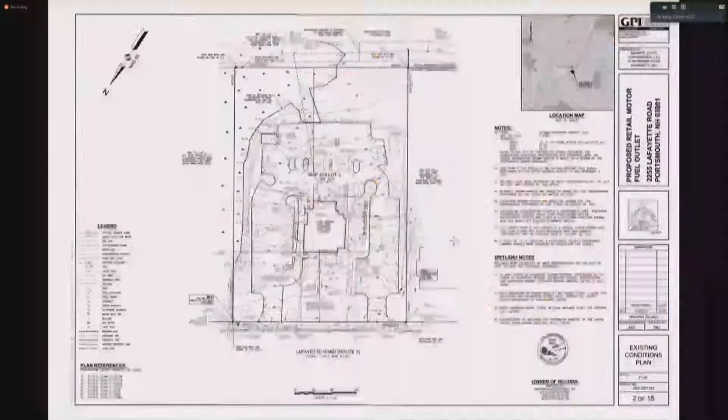It goes a little bit further away along the side, but I do want to mention that side wetland over to plan left or east on the plan is a swale. That is the outlet from the DOT culvert, from Route 1 or Lafayette Road, which outlets out into that swale and brings it back to the main wetland system. So it is kind of like a finger that comes out from the main wetland system.

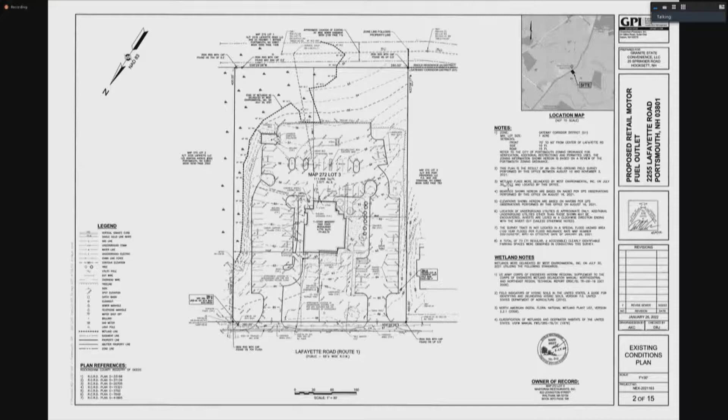Do you mind going to sheet 4? Okay, so what we're proposing is, forgot about this. What we're proposing is a 4,970 square foot building. It's going to be the Common Man Roadside.

Similar locations, there's one on Goffs Falls Road in Manchester, corner of Goffs Falls Road and South Willow Street. And then there's another on Plymouth Street. This will be similar to those. It is a different building footprint, but this is their new prototype footprint.

So it's going to be Common Man Roadside with a drive-through. As you can see on the plan, there is a main drive-through lane, and then there is a secondary drive-through lane for mobile pickup orders to allow the queue to go a little bit faster.

We are proposing 26 parking spaces, and then an additional 10 spaces are allotted at the pumps. At the pumps, we have 5 fuel dispenser islands, which means 10 fueling locations, or the 10 parking spaces that we have there.

I do want to mention, we did originally, way back when, I can't even remember what month it was, but I think it was last summer maybe, or at the end. Anyways, we met with Peter and the staff at the time for a conceptual staff meeting. And the original plan did show parking spaces.

Sorry, this isn't working for me anymore.

So we did show parking spaces along the wetland finger. We showed it closer because the edge of pavement does come closer. We showed parking spaces there. We showed a loading area, a bigger pavement area to the rear of the site, closer to the main wetland system. And I believe the USTs were over on the left-hand side of the plan too.

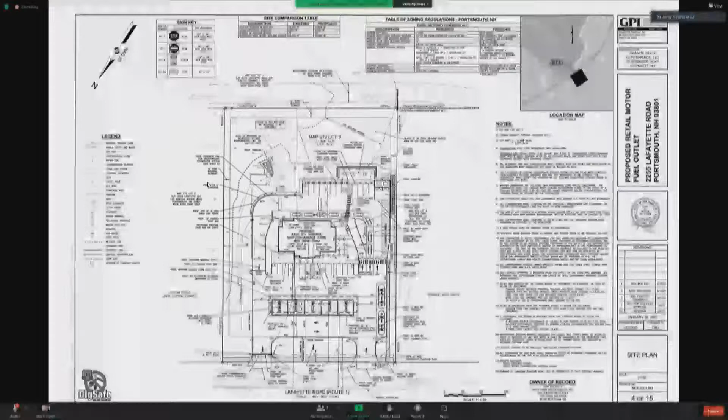The other thing that was mentioned was providing a chain link fence along the back of the site, just to make sure that any flying trash or debris that manages its way on the site is collected at the fence, rather than going into the wetland.

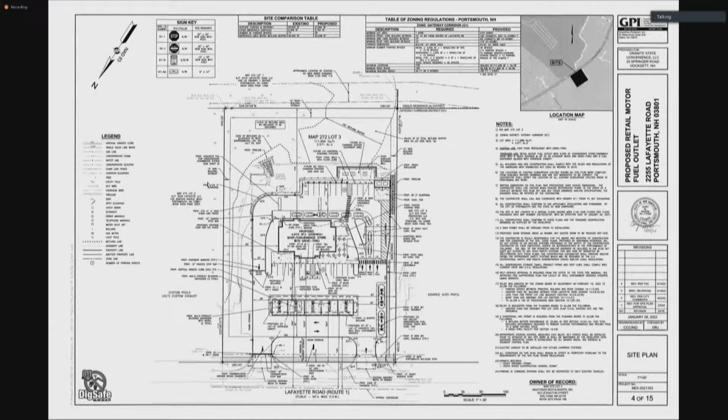So, to just talk about the stormwater that we've proposed on the site. Do you mind going to the next page, Peter? Thank you.

So there's various catch basins around the site, and there are deep sump catch basins with oil water separator hoods. We do have, all of that does go in the back.

We do have First Defense hydrodynamic oil water separators for a pretreatment unit, as well as an oil water separator tank in the back, just to make sure that any oil that spills on this parking lot is contained within either the catch basin, the First Defense units, or the oil water separator tank.

Then after the water is pre-treated, it does go into an underground storage system that's in the back of this property, back here. And then it goes into a jellyfish treatment unit, which I believe the city of Portsmouth is very familiar with those jellyfish stormwater treatment units. I see them popping up all over the place. So that is in the back, and that's able to treat all the water from the site.

So we're going from a site that has no drainage, no stormwater treatment on site. All the drainage existing is sheet flowing right into the wetland or to Route 1, to a site development that will treat all stormwater, both pre-treat and treat all stormwater before it does outlet into the wetland or off the site. With that being said, if you have any questions, both myself and Mr. Pernar are here. Thank you.

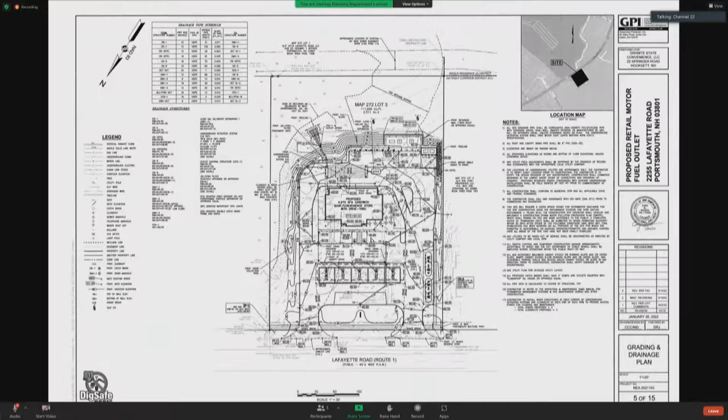So in order to do porous pavement, you have to do a whole batch. You're getting charged for a whole batch of pavement rather than just that small section. As far as the pavement on the site, I don't recommend porous pavement for a gas station. No, I understand that, but that's why I was suggesting sidewalk, patio, parking area, something like that.

The sidewalk along the building, I'd have to look into a little bit more. I know for maintenance reasons, they don't typically like to have them right against the building on a very frequented site like this, but I would have to do some more research on that.

So was there a maintenance plan for the jellyfish filter? Because I couldn't find it. It is in our stormwater management report. Okay, towards the back, there should be a stormwater management manual with that inside of it.

Okay, and then the final thing is that the fertilizer should be slow release. Okay. I think that was one of the comments that Peter had put on the letter too. Slow release.

Thank you. Others? Yes, Abigail. Can you talk about, the gas pumps are within the buffer and close anyway. Can you talk about, and I don't know where the storage tank is for the gasoline. Can you talk about, that's over there, okay. And the buffer line actually is back here.

Okay, can you talk about what protection you'll have for any leakage or anything? Sure can. So I know you found them yourselves right now, but just for everybody's knowledge, the USTs, the underground storage tanks, are as far away as we could get them. They're located over here. We are in the buffer a little bit over here with, I think, one of the dispensers.

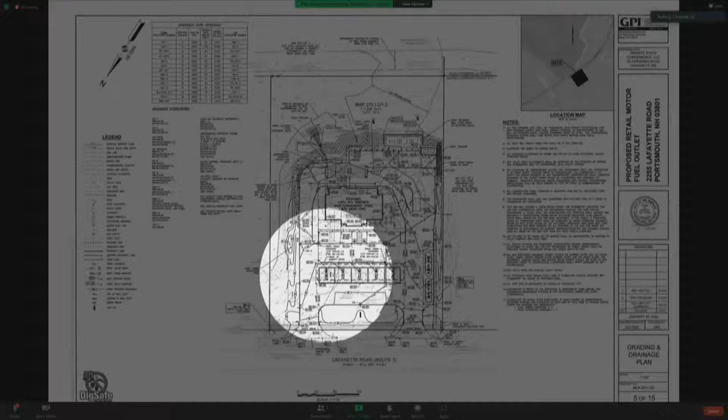So around each one of these islands, there are positive limited barriers, also known as spill prevention grooves. Those are your typical grooves within the concrete. So that's our first line of defense. If anything, say a couple of drops go on the concrete, or someone takes out the nozzle and has that handle on, that will contain that.

Within the dispensers themselves, if a car still has the nozzle in it and drives off, there's a shear valve there, so it will disconnect and automatically shut off the gas, so that is not a problem. Same thing with the actual dispensers themselves - if they get hit, again, it's automatic shut off.

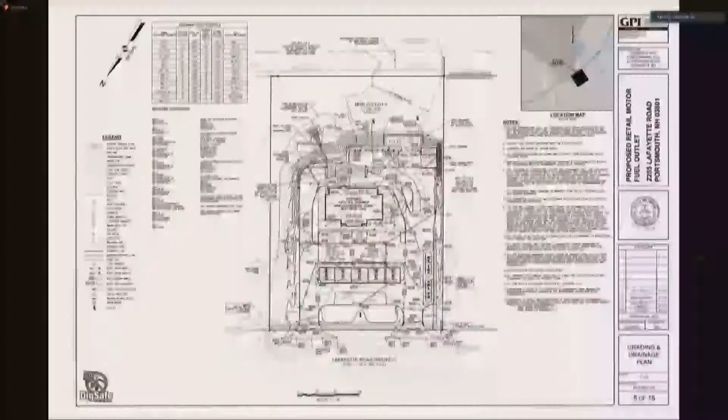Underneath of each of these dispensers, there is a sump that can contain any fuel leakage as well. Another thing we have is an alarm system. Each of these systems has an alarm system that detects minute losses in fuel. So if there is a minute loss in fuel, that will automatically shut down the system as well. So nothing can be going on underground that isn't alerted.

Along with the pipes are double-walled pipes, so that if there is something wrong with that interior pipe, that exterior pipe will collect it. Same thing with the underground storage tanks - they're now required to be double-walled fiberglass tanks. Those will be per DES regulations on the tanks, and those have sumps underneath them as well. There are vapor prevention systems in it as well, so that we're not having the vapors of the gas going into the air.

So there are multiple checks and balances within the system itself, and I can provide you literature on each one of these. I'm sure I'm missing one or two, but I can provide a sheet of what is contained in these systems as well.

Thank you. Any other questions from others? Yeah.

Many people who come before us that are close to wetlands in this situation, we ask them not just to use the right fertilizer, but to follow the standards of the Northeast Organic Farming Association. We can send you the standards - they're very flexible, just best practices for guidance so that you maintain the property with NOFA standards. That would be great.

So I know in the memo that the staff put out, there was mention of adding plantings along where we're removing the pavement. I'm guessing that the majority of buffer plantings we want are back here, so that will be added as part of the staff recommendations. Thank you, that makes it a lot easier.

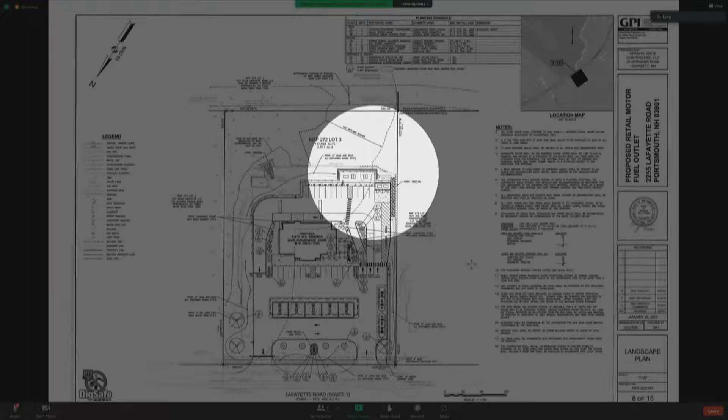As far as actual plantings go, we are not removing a whole lot of trees. There'll be some tree removal within the area where we have the sewer line going in, and we'll request minimal trees removed for that installation. As for actual buffer removal, there's a small section right at the corner of our charging equipment storage, and just a small amount up here. So as far as buffer goes, we're actually going to be increasing that, not reducing it. We are taking down that bigger tree in the front.

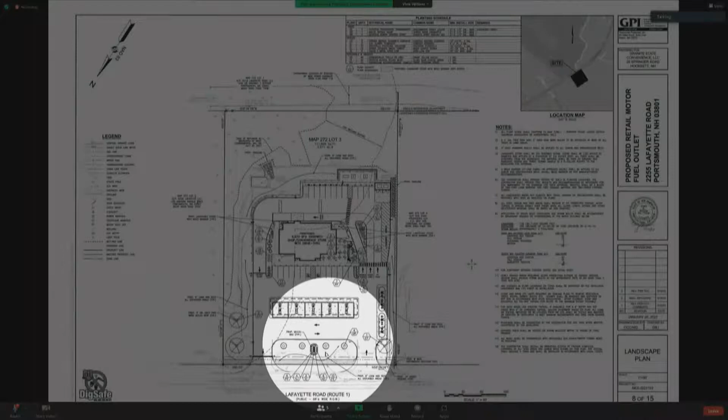I did have my landscaper look at it. One, it is close to the multi-use path, so some of the roots will be damaged with the installation of that path. Two, he believed it wasn't at its life expectancy, but that we could be seeing some problems with it, so planting additional trees would be better than keeping that one in front.

So we are proposing trees up the front, kind of street trees, and those are English oak, which will be in front of the canopy, the island in front of the canopy. The other ones are spring snow crabapple, which is the crabapple variety that does not produce fruit, and those are going to be along the sides there.

Sorry, getting mixed up here, that one is right here. The reason we don't have it produce fruit is because we don't want the fruit falling on the sidewalks and becoming a liability. The ones along the sides are honey locust.

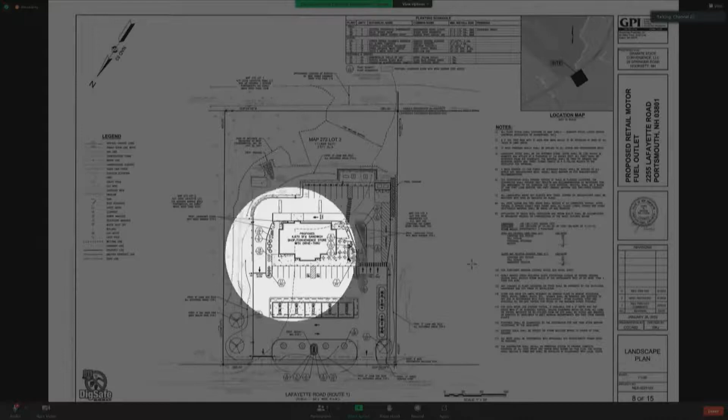So what our landscape architect tries to do is vary the trees along the site so that if there's a disease with one of them, it's not hitting all the trees on site. We're proposing different shrubs, inkberry and dogwood, which are native species, spirea, low yew, typical of a commercial site, as well as perennials and grasses like daylily and ornamental grasses along the site. Those are primarily around the building, with some around the sign up here. As I said, we'll be adding more buffer plantings along this edge and more back here, where the pavement will be replaced by buffer.

Okay, and then on the maintenance of that, do you know how—I didn't see it in the maintenance plan, but I'm guessing it's in there—how often you're going to mow, or if there's grasses, are you just going to mulch, or any of that?

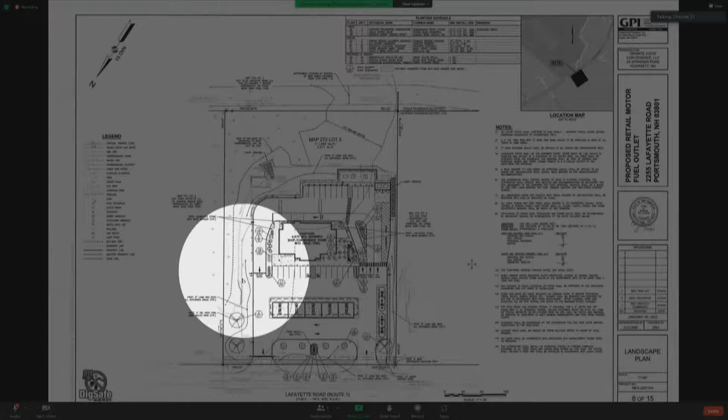If it's the preference of the board, we could leave that non-mowed and in a natural state, with just some trimming along the edge with a weed whacker or whatever. As far as buffer plantings go, our landscape architect would pick plantings that are native and require no or little maintenance.

Allison suggested mowing the areas discussed, like behind the fence and along the swale, only once a year. The reason is that more frequent mowing can lead to invasive seeding.

Thank you. Any other questions? Comments? No hands up from virtual attendees. Okay, can I ask one more question?

Going back to the oil tank storage conversation, the oil water separator treats anything on the surface, that's stormwater treatment. Is there anything for when things leak from the tanks themselves? I know there's a shutoff to stop it from going further, but is there anything for subsurface leaks?

Is there an issue if it's against the building now? Just to let you know, the actual patio is this area here. That isn't within the buffer. The buffer line actually comes in right here. Okay, I can't really see that, but I believe you.

Not in the buffer, huh? Okay, so you've got like 4 stipulations? I think there were 5. What was the fifth one? The wetland seed mix and mowing it once a year.

I had one question about whether or not we need to add the fertilizer. No, just slow release. Well, I figured that if we're following NOFA standards, that should take care of it. Yeah, it would take care of it.

And the Green Snow Pro certification, was that a requirement or a recommendation? I suggested that it should be a requirement. No, I just wanted to get my notes right. It's a condition, required.

The staff memo also includes this request about signage along the wetland edge. I put in my memo that they could put signs to show where the wetland edge was. If you guys want to add that, that's up to you. Yes, thank you.

Okay, 6. Do you want me to rattle them off? Sure. I'll make a motion to recommend approval to the planning board of the application for Lafayette Road convenience and gas station, with the following stipulations. So 1 is that they should follow NOFA standards.

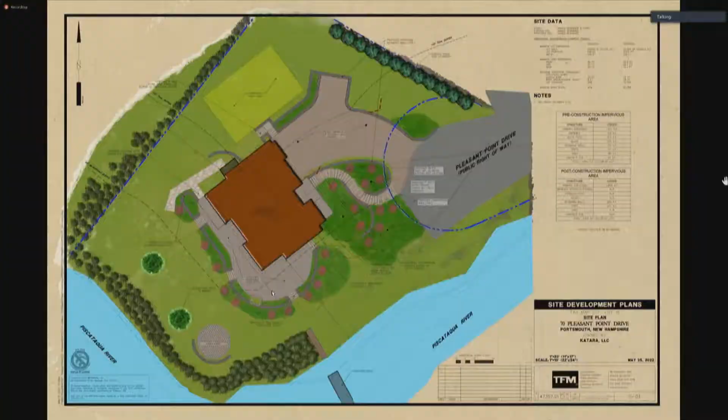I had a question about that, what is that made of? I looked at the brochure, but also looked online and got two different answers. Some of the filtration tubes are synthetic material. We've used hay wattles before that are stuffed with that, so the hay eventually breaks down, and at that point the roots of whatever has been plugged in or live staked have taken over. So not using synthetics? Not using synthetics, that's the intent here, correct. Okay, thank you.

Other questions? Nothing from these guys? Nothing now.

This is a different topic, but is there a septic system here, or are you on city sewer? It's city sewer. Okay, just curious.

I had a question about the patio out front, that little circle thing. Actually I didn't have a question, I had a comment - that's pretty intrusive in the buffer area. It's something I would not recommend or approve of at this point. I think you're kind of pushing the envelope with putting something down by the water there, right in the buffer. Pervious or impervious, it's still going to have people down there, so that was really a red flag for me on that.

I can understand that, and I think in the memo it was suggested, or asked of the commission, whether they felt a site walk was necessary. Part of the reason we like the site walk is when you get out there, you can visualize where that patio is proposed, then you hit this large, dense clump of plantings, and then you're into like a 70 to 80% slope down to the water's edge.

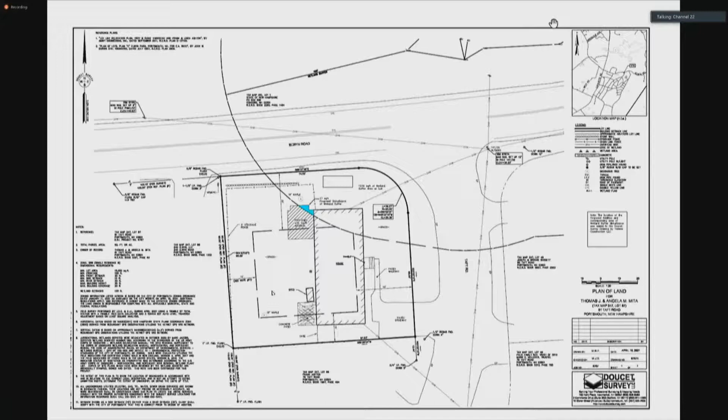They absorb carbon. I believe, as part of the project with the dimensional variance, the fence had to be removed, so there'd be a lot of options for them to probably add some trees or different things for just privacy barriers. Yeah, I agree with that. That's part of our future plans once the construction is done.

Thank you. All right, roll call vote. And I'll start with... go ahead. You want to go? I'll do it, yeah, sure.

Sam? Yes. Ted? Yes. Allison? Yes. Abby? Yes. Lynn? Yes. And the chair votes yes. Thank you very much. Thank you. Appreciate it.

Okay, next on the agenda is 11 Fletcher Street, one I keep running into when I scroll down. Sorry, Alex, I'll get that up in a second. That's okay. Where's my... oh, there it is. I don't want that. Okay.

You just want the site plan? I guess the site pictures first would be great if we could do that. The site photos? Yeah, okay.

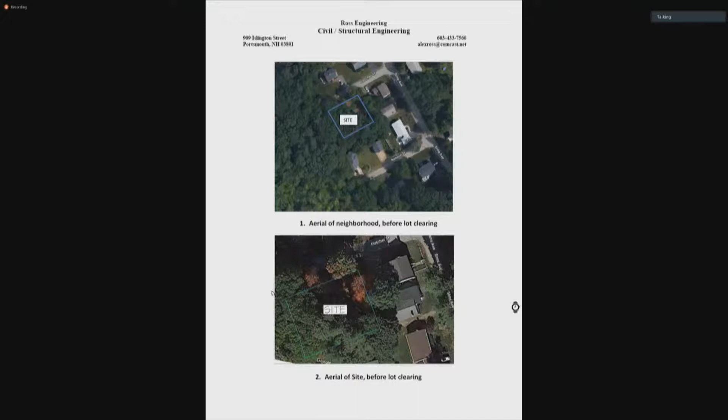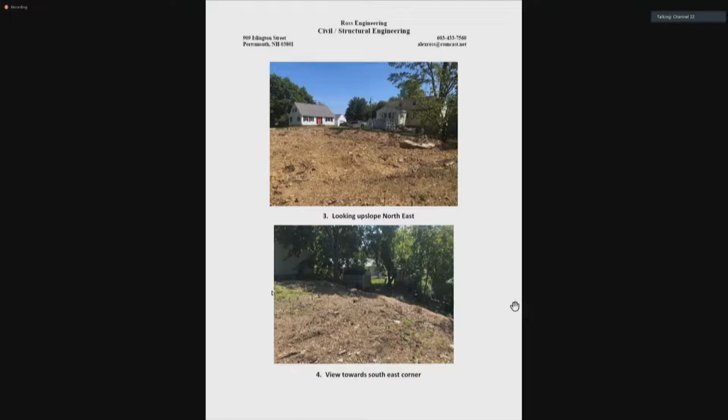Right now this parcel has been cleared. Up on Fletcher there is some ledge, and then the site slopes down the hill towards Benson, the next street, and then off into a wooded wetland buffer area. If we can go to the next one.

In working with DPW, we actually had a bunch of different design options. Our first goal was to stay completely out of the 100-foot wetland buffer and not do anything in there. But because of the site topography, DPW wanted us to put our stormwater under drain outlet, which is essentially like a foundation drain for a house—a small 4-inch pipe with some stone around it. They really wanted that in that back corner where it's not a steep grade and headed directly towards the wetland in that wooded area behind there.

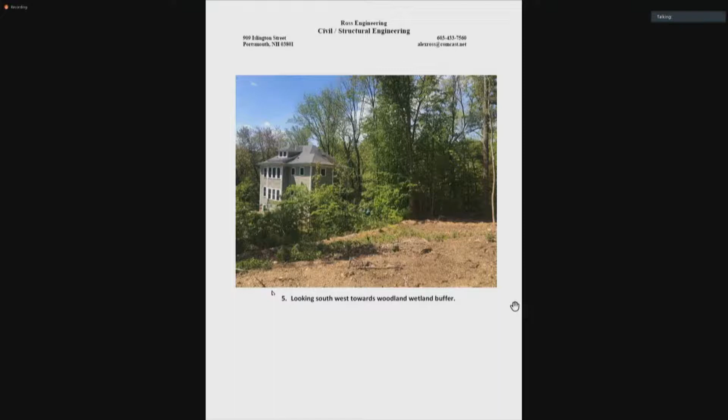So now, Peter, if we could go to the plans. On this existing conditions plan, this is our parcel up here. You can see there's some ledge outcrops up by Fletcher, and then this site slopes down the hill down here.

You can actually see there's a house, the neighbor's house way down here that's very close. We did delineate the wetlands and they're out here, so we have our 100-foot buffer cutting across the site right there. If you could skip to the next sheet.

So this is our site plan. You can see we've sited the new house and all the structures, the driveway, the deck, everything beyond the 100-foot buffer. So there's really nothing in the 100-foot buffer.

But then DPW did want this storm under drain located in that corner, so we've done our best to design that so it's minimal impact. It would just be putting in a 4-inch drain line that as it comes down that corner would run for about 12 or 13 feet perforated in a stone trench, and then there would be an area of stone where it daylights. We've also shown some wetland buffer plantings around that area in green.

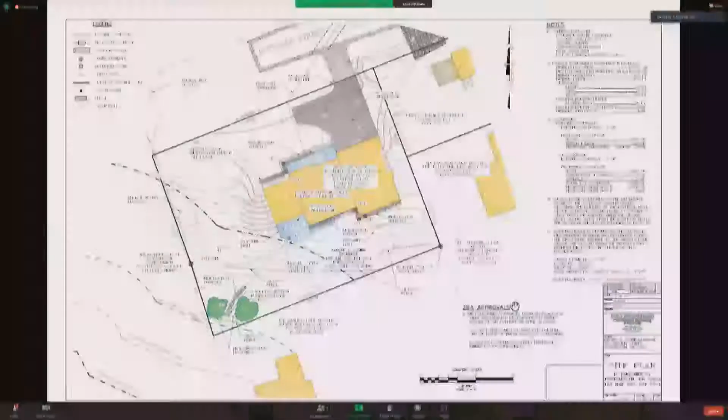So we did have other locations on the parcel. One was more here, kind of behind the house, but outside the 100-foot, and another was up here. But we did do a site walk with DPW, and their thinking is the outlet should not be in a steep area where, as you go up that sideline on the left, the contours get closer and closer.

So they really wanted it in this area that's very gradual, down in the corner. You can see on this plan, the house to the south—the corner of that house is 15 feet from the actual wetlands. So that's in a low-lying area.

What DPW does not want to have occur is if we had a drain outlet over here, it could possibly flow more towards that house. I wouldn't have thought that—I had it going off more to the side, to the left of this drawing, to keep it further away from the other house.

But it's not exactly flat once you get to that area where it's drawn here—still got a good steepness. It's not exactly flat, but it is less steep than the other areas.

We can add some details to the wetland buffer plantings around that stone outlet and even expand it. What we're trying to do is really contain any disturbance to one area—probably some red maples down there and other shrubs would fit in nicely.

I'm wondering about a rain garden potentially? Yeah, so we did think about that. In the past, doing rain gardens under city review, they like to have an under drain—your rain garden's up here with your filter mix, it comes down maybe 3 feet below the top, and you have an under drain. So we'd have trouble doing that down in that corner.

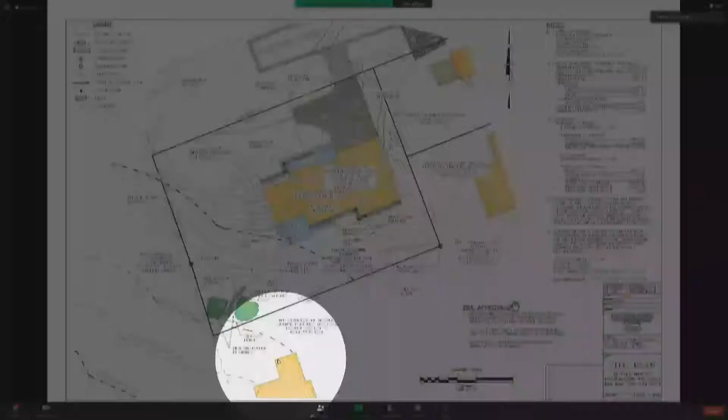Yes, so that parcel down to the south, before any work was done on the site, that homeowner has approached DPW quite a few times, because they're so close to the wetlands, because they're in such a low-lying area. Because of that, DPW said for this parcel they want a full stormwater management plan, a drainage study, and all that to be engineered, stamped, and submitted. So we've done that too, and given it all to DPW. Wasn't that also a Board of Adjustment requirement? Yes, I think it was.

Okay, so there's kind of flooding, yeah. And the trees, just to reiterate, replanting and putting trees in will also help with stormwater, because so much of the water gets caught in the tree canopy and never even reaches the ground. I'm sure the owner can speak to this, but I'm sure it's his intent that after this gets built out, there will be extensive plantings around the site. And if the board needs a landscape plan to show how that's going to shake out, we can prepare that.

Okay, thank you. So in light of that, if there's no other questions, I was wondering if the applicant would prefer us to postpone a vote to prepare a landscaping plan. Well, I guess what are the options - is it possible to review as is with the condition that a landscape plan be submitted, or how?

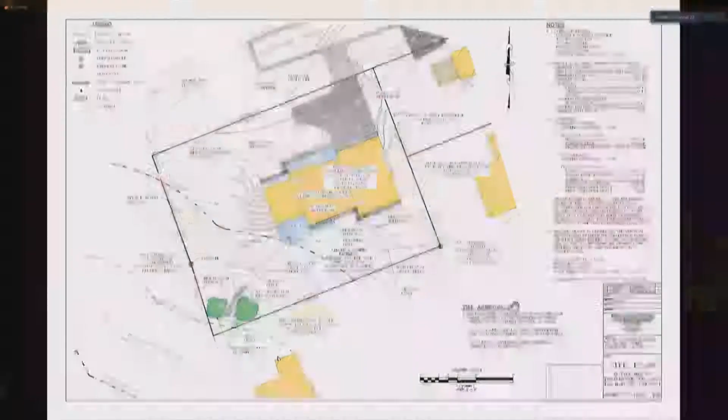A few of those trees that were cut in the buffer area were dying anyway, and that was some of the decision process behind it. We do plan on planting some new trees in there, but the details of that aren't here yet. I would really appreciate if we could get something approved with stipulations, because we are running against construction schedules, and we've done a lot of work to move the house outside of the wetland buffer. So if we postpone this further, it's a hardship for us, and I'd really appreciate some flexibility if we could consider approving this with some specific stipulations on the planting. Thank you.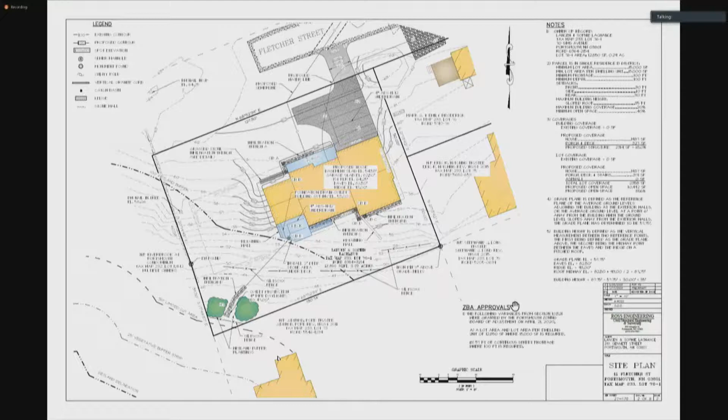All right, do you have any kind of a vision for the landscaping there? No, I'd really be interested to hear your recommendations on stuff in this area. I'm not a landscape expert myself, but we're quiet people, we like nature, and we do want to maintain that conservation kind of feel outside in the back of the house there. So if you have some specific ideas, happy to take those under consideration and figure that out. It's a great spot.

Yeah, thank you. If you want to save that oak, I'd say move the wood chips away. Okay, anyway, thank you, it's a cool tree.

Okay, thank you. Yes, no, I'm just wondering, Peter, is it possible for you to look at a landscape plan? I mean, I want a landscape plan in place before this is approved, and whether we have to look at it or if you look at it, I think that's... If you can give me some guidance on what you're looking for, so do you want it to look like, how many trees?

I mean, do we want to just pick a number of trees? Usually when we have a landscape plan, we want a nice bunch of shrubs in the buffer. This is like a forested landscape plan. I think it depends on the type of trees and shrubs being planted, but there need to be trees and shrubs.

I'd say if we had maples about 20 feet apart along the buffer area, that would be a good start. Or oaks - there are a lot of oaks and white pines right now, so if we could have something replicated that is like what the surrounding canopy is, that would be great.

What sheet do you want me to go to? I think it's like you just keep scrolling. Yeah, right there. That one? Yep. So again, this is the site plan. What sheet is that? Sheet C102. I'm not sure which number in the set it is.

So it's a very similar configuration to what we had shown you at work session, minus the driveway out to Portsmouth Boulevard. To the right of the plan is where we're proposing to restore the buffer area. That is the area where we're removing pavement, along with the area we are disturbing for the stormwater outlet, which is discharging to that wetland area in the back.

The other two areas I want to point out while we're on the sheet is at the top of the parking area, there's two clouded hatched areas. Those are our two proposed snow storage areas for this site. They are right along the 100-foot wetland buffer, but I want to note that along that entire property line is a very large berm. So any snow melt, as it's melting, is going to sheet back into the parking lot and then be collected in the stormwater system and treated before it gets discharged. That berm wraps around the top of that parking area and then also down the right side of the site.

If you go to the next sheet, please. So this is our grading and drainage plan. As I've already stated, all the surface runoff from the site is being collected. It'll flow through a jellyfish filtration unit and then discharge out to the rear of the site, which is on the right of the sheet here.

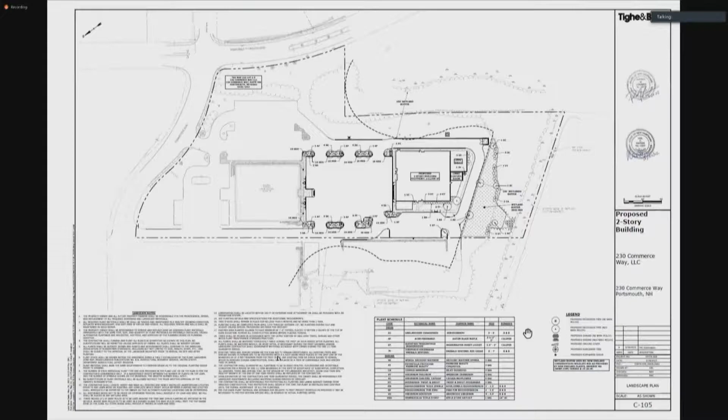Questions? Yes, Allison. I just can't commend you enough for not putting that roadway through to Portsmouth Boulevard, really. Yeah, I think my sentiments exactly. I think we got the exact same feedback from every board we met with, so thank you. I'm pretty good with it. Okay, I'm good too, even though I'm not allowed to vote. Sam's hand's up. Sam?

Is there a fence that's going down the line of where all those buffer plantings are going to be, in between the one-way road and the new buffer area? So there is not. I know on sheet C102 there is a call out for one, which should have been removed. That was caught yesterday at TAC.

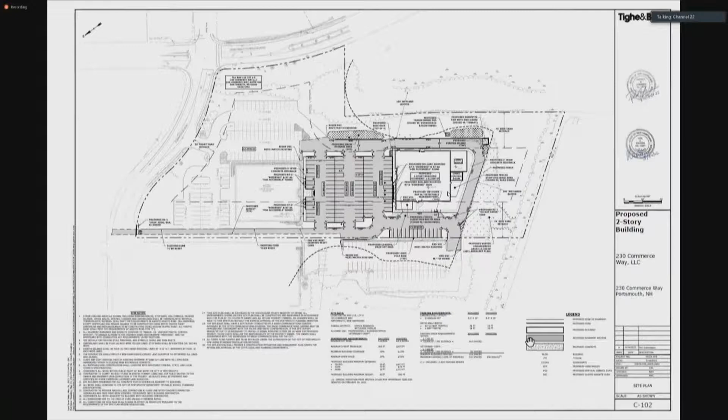There are, and I did not mention this earlier, but there are 2 fenced-in areas adjacent to the building for pet relief areas. There's one right at this corner of the building, which is for patients, I guess, it's a vet - people bringing their own dogs out. And then there's a second area at the back for staff to bring the dogs out that are being kenneled there post or pre-surgery. Those are fenced and enclosed, so that will keep the pets from doing their thing out in the buffer area.

I think if there is no fence, which I think is fine, I think there should be some signage up just to show that this is a wetland buffer and to make it very clear that it is not to be used for pets. Yeah.

Peter, could you go back one sheet please? So this is the existing condition of the site, just a large paved parking area. Along the back here, this diagonal line is the buffer line, so all of this pavement in the buffer is being removed as part of this project. The area where that pavement was will be restored and planted with the wetland buffer mix, shrubs, and trees. That's great.

It's awesome that you're redeveloping a parking lot. Yeah, it's adding some use to pretty wasted additional space right now. Totally.

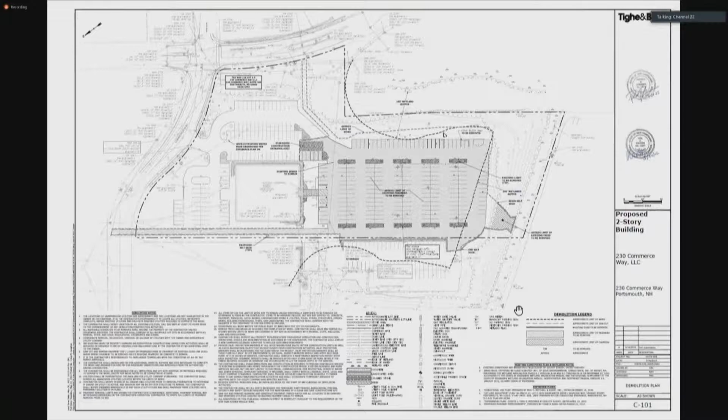I had a question. This is the one where your weed barrier fabric, I looked that up, is polypropylene. Which one was that? It was a weed barrier fabric, and I don't know what page that's on, because I can't find the same page.

It's fabric sheets, in the details maybe. Oh, you're looking for it now. I'm looking but I don't know. Was it a planting detail or something else? Why is it not telling me what page? Oh, it doesn't show it, it's not showing the page. Why would it not show the page?

It's on page 215 of the packet. I don't know if that helps. That's the whole packet. Yeah, I don't have numbers in it because I'm sharing my screen. Oh, you don't have the numbers? Yeah, so 215 is C506. Okay, there we go. C506.

Is it on one of the planting details maybe? Yeah, which one is it in? Is it in one of these planting details? Yeah, I think so, but I just wrote down 215. That's the problem with doing the... C506. Oh, you wrote it down before, you don't see it now. Right, I see. C506, want to look at my screen, Barb? Yeah, hold on, let's see if I can find it. Oh wait, I found 506.

Okay, thank you. Just to say it's page 20 if you did the packet. Yeah, so you did the non-packet version, on page C506 under perennial planting. You have a diagram, I think, with two. Do you see the diagram? Yeah. At the top it says weed barrier fabric, Mirafi MiraScape, or approved equal. Yes.

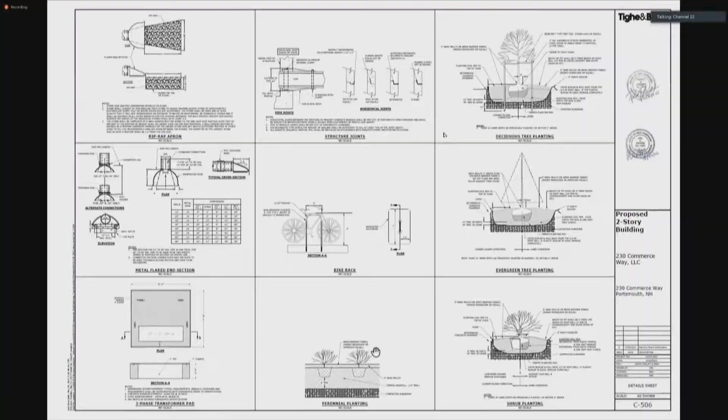So it'd be nice not to have polypropylene all over the place. If you can come up with something natural, I know it's going to biodegrade eventually, but so does the polypropylene. That's fine, we can do like cardboard or something, and just maintain it. Yeah.

And my other question was a little bit on the signage, I just want to reiterate at the very least on that area where the wetland seed mix and plantings are, and the maintenance of that wetland seed mix, just to be mowed once a year or whatever. Yes, that is the intent.

That's it. Any other questions from anybody? No? Do we want to make a motion?

Yes, I'll make a motion that we recommend approval to the planning board of 230 Commerce Way with two stipulations: one, that there's signage regarding the wetland buffer and no pets allowed, and two, a natural weed barrier, not plastic. Thank you. Discussion? Second?

I'll second. I was already going to. Abby seconded, and discussion? No.

I think everybody kind of mentioned that moving the driveway was awesome. Yeah, that's the only issue I had. Oh wait, and that's why I wasn't...